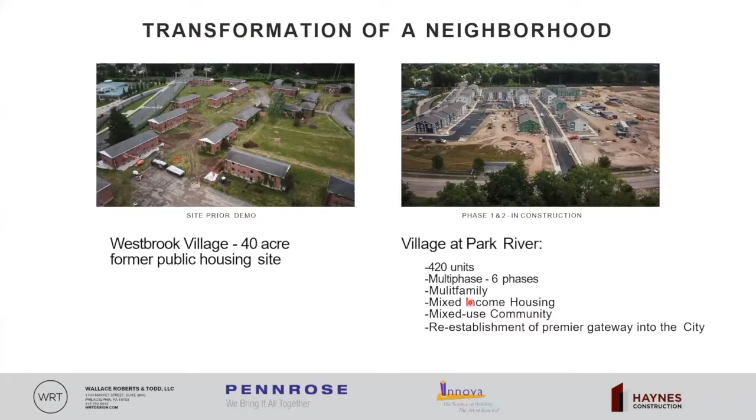So here is the master plan. So phase one here, the 6 buildings will be certified to PHI standards. Phase two will be certified to PHIUS+ 2015. Phase three to PHI. And phase four, we are currently working on the energy model. We are actually working on the energy model for PHIUS+ 2018 and having some struggles.

With some tweaking, I would say we are able to meet the heating demand and the cooling demand of the project, but we are struggling to meet the source energy criteria. I know the threshold has tightened for a good reason from PHIUS 2015 to PHIUS 2018, but we have yet to figure this out. So the 3 phases which have been awarded low-income housing tax credits will give us 200 units. Phase 4, which will go into submission this fall, will be an additional 60 units.

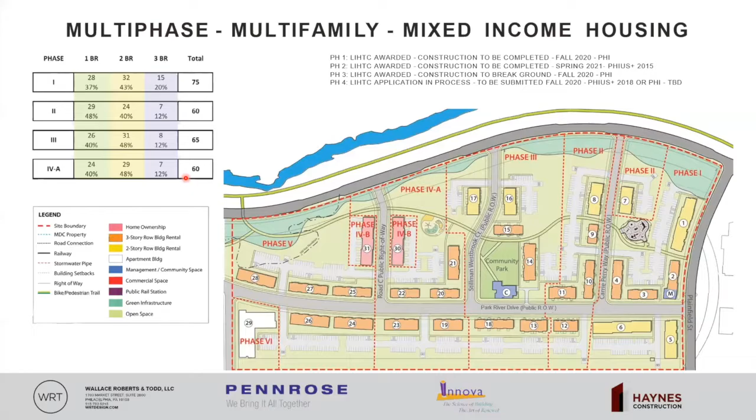And we also provide PV for each phase. We've been providing to accommodate for about 33% of site lighting. So all put together, I think it's been a great opportunity to be doing passive house in the state of Connecticut. Here are some pictures in construction, phases 1 and 2. You can see the nearly completed buildings of phase 1.

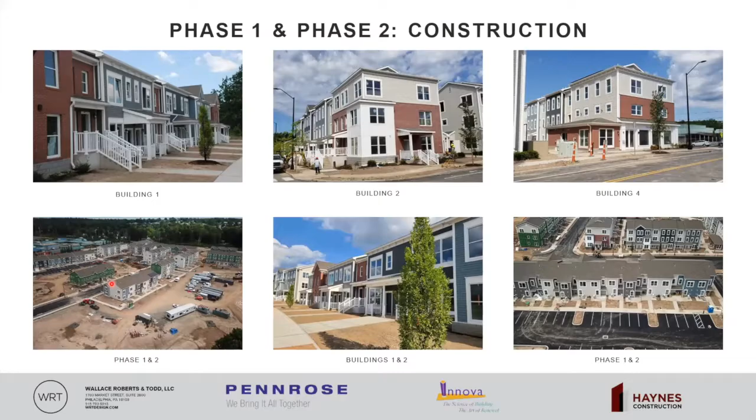Moving on to some passive house envelope features. So we have used XPS for sub-slab rigid insulation, and then 15 mil Stego Wrap for the vapor barrier. The exterior wall assembly is ZIP R12 exterior sheathing combined with R21 batt insulation. The exterior doors here are not passive house doors. Actually, the client didn't like the look of the passive house doors, so we are going with Masonite insulated solid core doors. I think it's like an R7 or R9. So we did model that in the energy model. However, as you know, we can't model air infiltration.

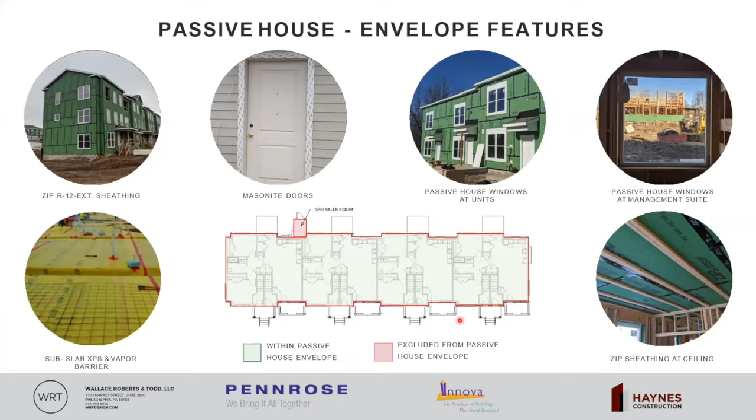The windows are passive house rated Alpen windows in the units, and in phase 1 we have a small management space, which also has these roughly 6 feet by 6 feet passive house rated windows. And at the ceiling air barrier, we chose to use ZIP sheathing. You'll see this detail in a few minutes. So they're all low-rise, and all the buildings follow this kind of concept. Everything is within the passive house envelope except the sprinkler room.

So here's what pretty much captures what I just talked about. Rigid insulation for sub-slab, which gives us an R20 for most buildings. There are some buildings which are pretty tight; we had to bump it up to an R30. ZIP R12 exterior sheathing combined with R21 batt, which gives us about an R33. And the roof is blown-in cellulose insulation to about an R100. As you see, our passive house air barrier is terminated at the ceiling, and the attic space is excluded from the passive house envelope.

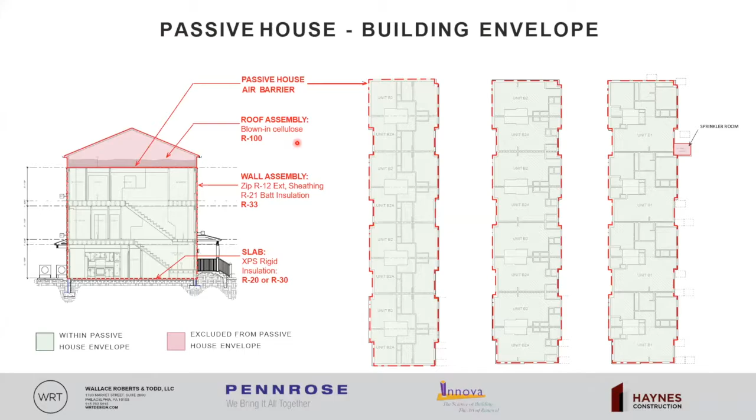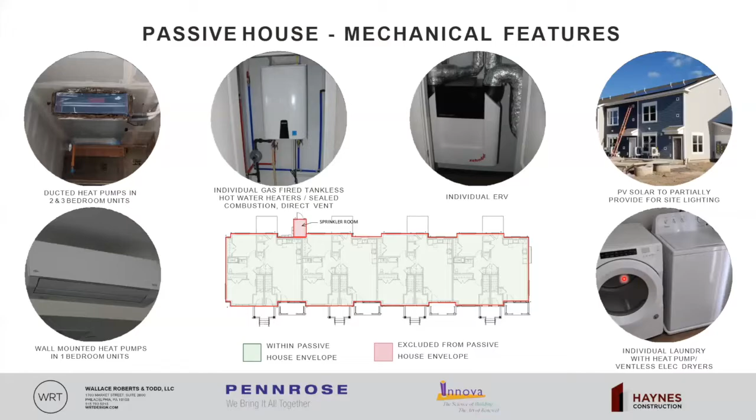Moving on to some mechanical features, the 1-bedroom units have wall-mounted heat pumps. And then for the 2- and 3-bedroom units, we have ducted heat pumps. The hot water heater for all units is a gas-fired tankless on-demand system. Each unit has its own individual ERV. This is the PV, which we have on 1 building in each phase, providing to accommodate for about 33% of site lighting. And the units have their own washer and dryer with a ventless dryer.

So the data you're seeing here is coming from the energy model. This is a worst case building for each phase. And this is building 15 in phase 3, which seems to be our tightest energy model. Phase 3 is PHI. When I say tightest, it's not due to the EUI; our heating demand is getting very close to the threshold.

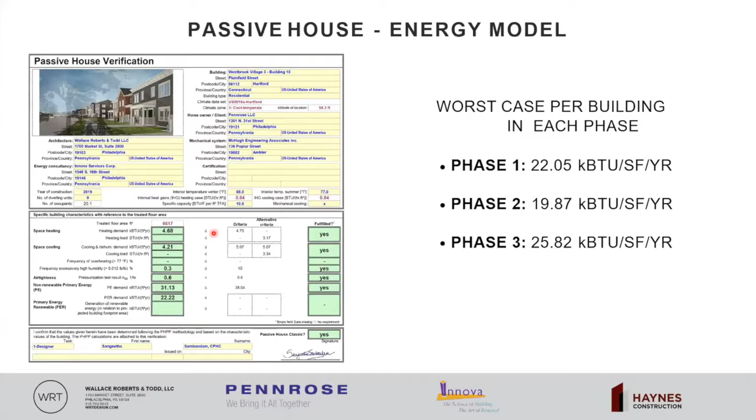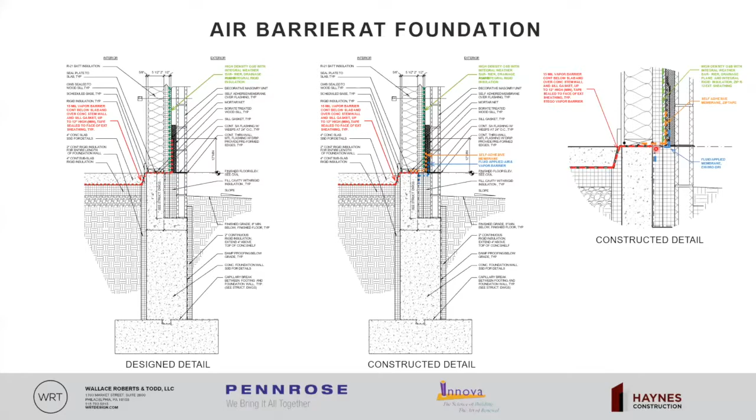Here is just to bring some discussion to how we had designed the air barrier detail at the foundation. We had designed the Stego Wrap sub-slab riding up the edge of the slab under the sill plate and vertically riding up the exterior ZIP sheathing. However, the GC struggled with this detail, and what's happening as a construction detail is pretty much this. So we're doing the Stego Wrap. The Stego Wrap stops under the sill plate, and then there is ZIP tape to bridge that and take it over the exterior ZIP R12 sheathing. And they're coming back with the fluid applied air barrier to make it a continuous air barrier.

So the windows are passive house, as you know, triple glazed. We detailed it to include the self-expanding foam joint sealing tape. However, that was VE'd during the process. I think it's a combination of the GCs not being familiar with the practicality of installing this, and also cost. So on site, what actually happened is it got closed cell spray foam as the air seal.

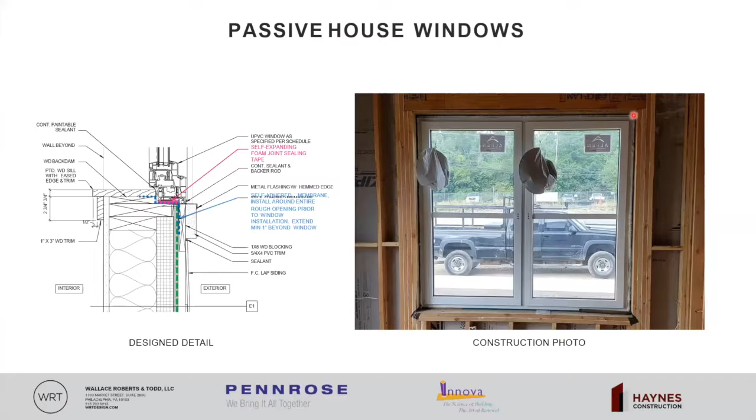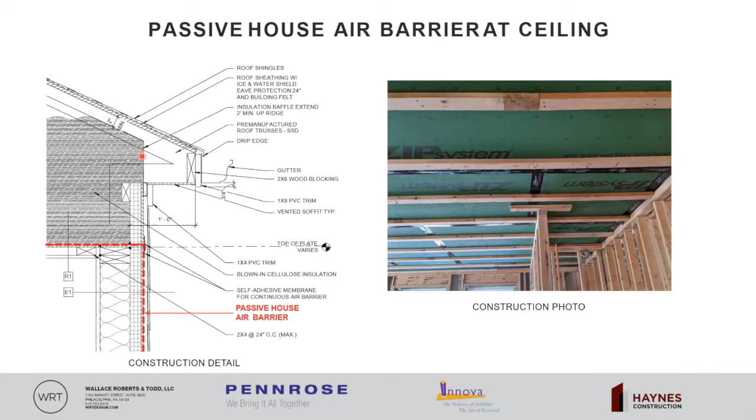So this is the passive house air barrier detail I'd mentioned previously. So we're doing this kind of a sandwich system. We have the ZIP R12 as the wall assembly, and we're continuing that at the ceiling with the ZIP sheathing. So for some testing information, as some of you may have heard at this afternoon's presentation, Adam Blackburn talked about how CHFA requires all testing protocol to be per PHIUS, regardless of whether the project is getting certified to PHI or PHIUS.

That being said, the preliminary testing has been completed for some of the buildings, not the final yet. That will be done anytime soon. So for the final testing, we had to do these openings between each demising wall condition, about a 12 by 12 opening for the Passive House whole building testing.

And also we have stacked flats, so we had these openings made at the raised porches. So this was happening at every floor at the demising wall. After the Passive House whole building testing is completed, the GC has to come back, patch everything, air seal, fire seal every location, and then the Energy Star testing for individual unit compartmentalization is done. So that's a bit of a process, but I'm not sure if there's any other option.

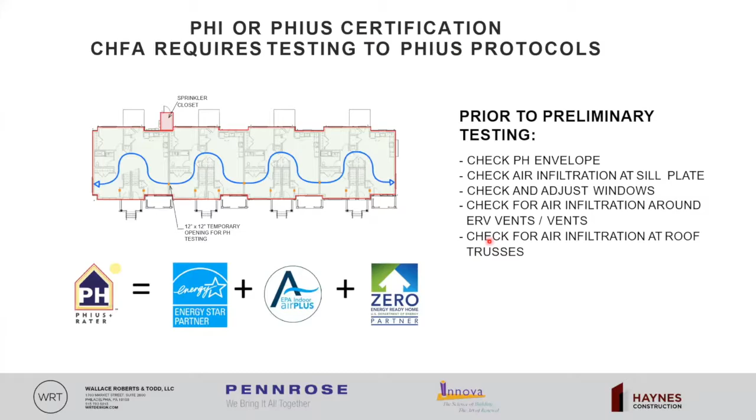In preliminary testing, we found that there was a lot of leakage at the Passive House envelope. There was air infiltration at the sills. The windows somehow were not adjusted, so the windows had to be adjusted on site. Air infiltration at the ERV vents was a bit of an issue. There was some wood blocking we had shown in the detail, so that had to get fixed. And the heel of the trusses was a location where there's a lot of air infiltration coming in.